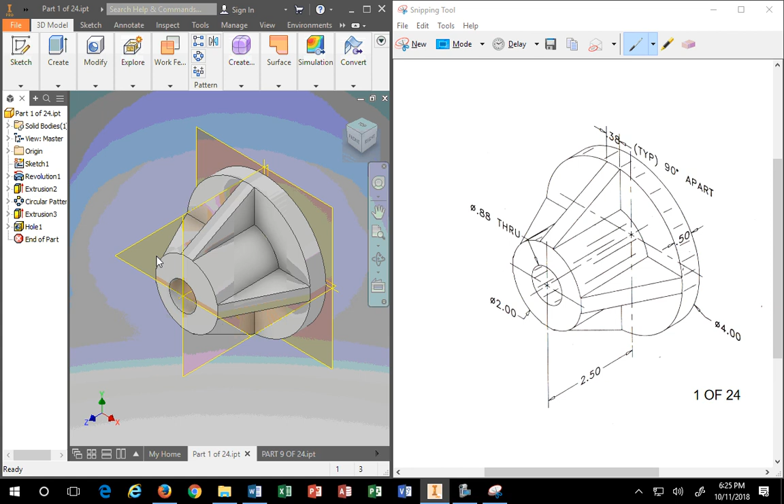The way to create the model, I have to open this up real quick here. We've got our model. If we go to File and New, you cannot use Export because that just creates PDFs. You actually go to File, New, and what you want to create is what's called a drawing. That'll generate a detailed drawing.

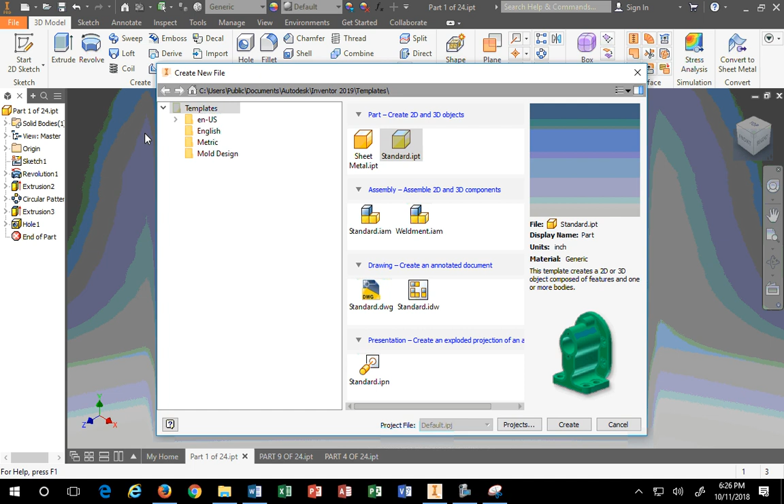You could go to New itself, and you'll get this dialog box of creating drawings. What we're going to do is go to English, and here, down here, we're going to make an IDW, not a DWG. IDW is an Inventor drawing file. DWG would be an AutoCAD file. So we're actually going to do an IDW.

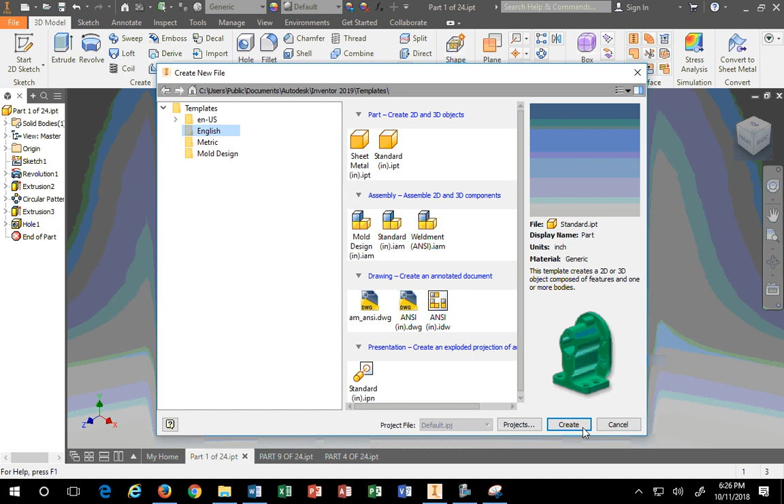If I go up here and just go to File, New, I don't see IDW. I see Drawing, DWG, as a default. If I click on this and wait a few moments, we'll see what pops open. It does take us into an IDW as well.

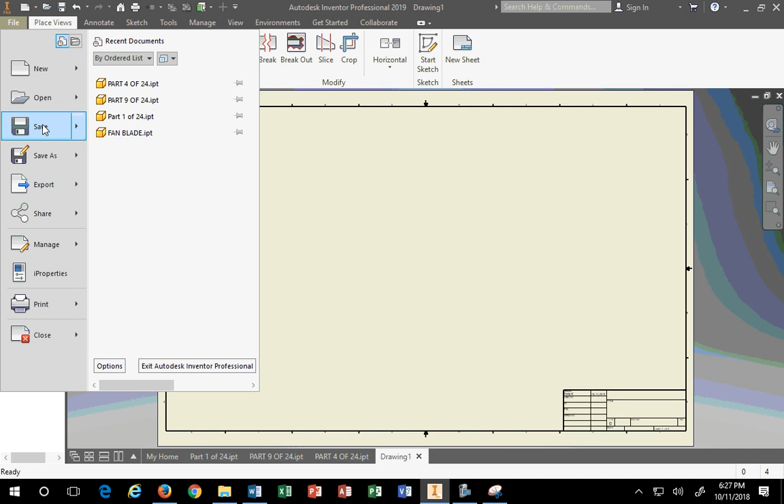And this is what an IDW looks like. It's an Inventor drawing file versus an AutoCAD drawing file. So if you go to New, and you pick ANSI IDW, and you hit Create, it'll pop open another IDW. Got it?

So either way, whether you go to File, leave my mouse there for a minute, and pick Drawing here, or File, New, and pick it here, either way will result in the same outcome as far as where you start, right here. So now I have 3 drawing files. I'll delete the first 2, and here I am with the first one.

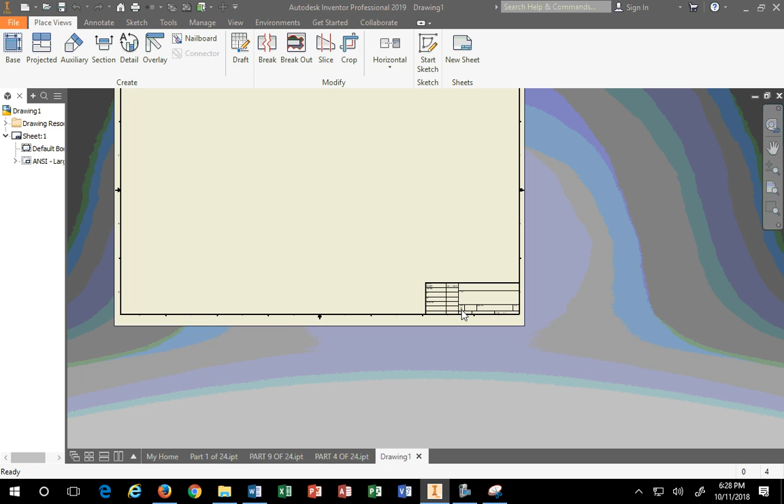The default setting, if you're out of the box, is the very large file type drawing file. It is technically what size? This is size D. It's a D size drawing. You will not make any drawings in D size. You will only do A size drawings in here, which means an 8.5 by 11 sheet of paper. You won't have a choice on that.

So your first order of business is to make sure that your paper size is correct. It's not to insert your views, because if you insert your views and assess everything in terms of D size paper, that's a huge sheet of paper.

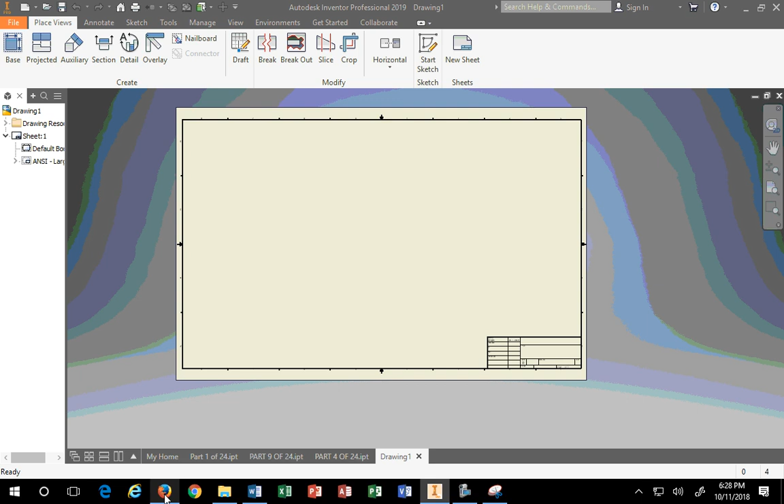To prove the point, if I jump online and look up D-size paper, you're going to find out there's ANSI A, B, C, and D. It's a 22 by 34 sheet of paper. It is very, very large. It is not the size paper we're going to be working with in this room. We are doing A size.

So then the bigger question is, where do we find this? How do I change my paper size? And can I ever create a template, once I do set up my paper and everything's perfect, for those of you that have your own laptops? The answer is yes. Once you have a perfect border with a title block the way you want it, size paper you want, you can save it as a template.

For those of you using these computers in this room, the answer is yeah, you've got to save it on your flash drive, because the default, when you do template, won't work. Meaning, when you go to File, New, if it doesn't reside on your computer, it's not going to pick the correct template. It's going to pick the one that belongs to the computer. If you're using your laptop, it will be your template. So if you're using your toys, that's fine. But if you're using our toys, no.

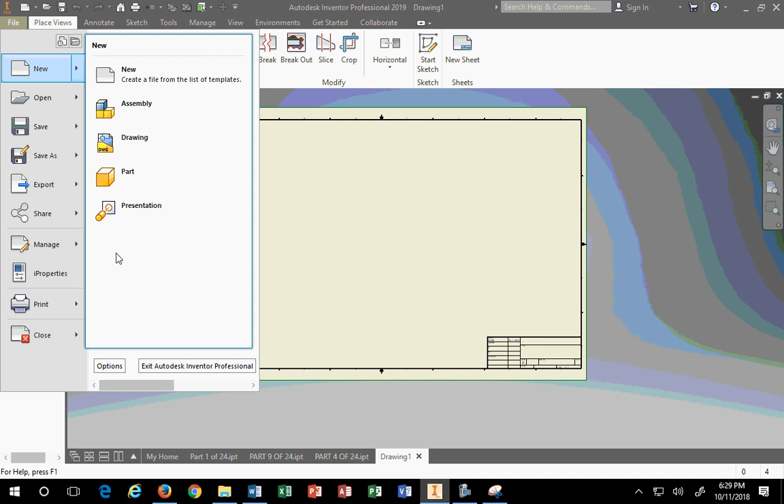You technically don't have a template. There's a way around it, but it's not as simple as now I can just pick it. So keep that in mind. In here, the first thing you want to do is figure out how to change your sheet size. That's your priority. So when you go up here, I'm going to do this a little bit at a time just so you see the process.

When you look at a drawing file, an IPT is Inventor part file, correct? So an IP, is it an IPN? What is it? What's IPN? When we go to New, you have IPTs, you have IPNs, those are presentation. You have IDWs, which is a drawing file.

You have IAMs, which are assembly files. Assembly files are next, that's what we'll talk about in a couple of weeks. What we've spent our time in is IPTs, and now we're going to spend some time in IDWs. We are going to spend time in IAMs and making a sheet metal of an IPT. That'll come up later.

So when we are in here, your views presentations are like, if I want to drop my views, bring in a base view, projected views, all that's up here. Draft is something that's useful, we'll talk about it later. These are different kinds of views.

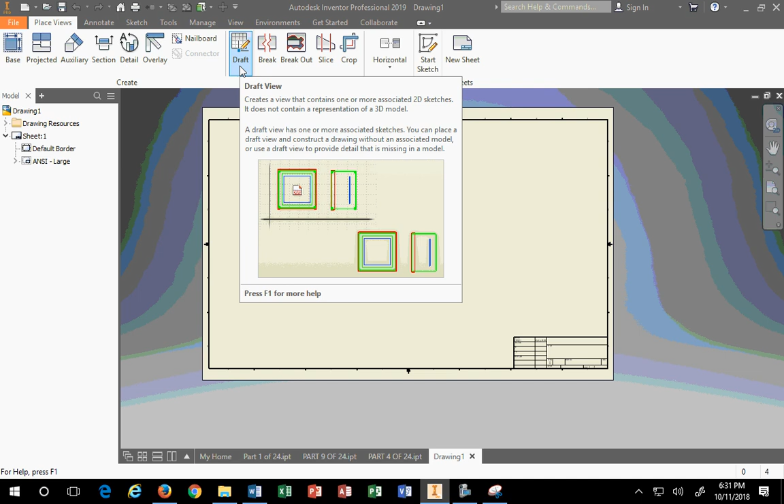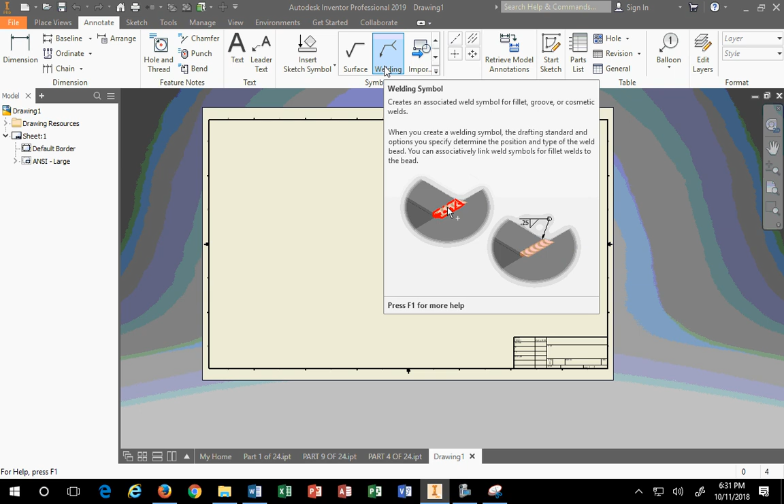Broken views, breakout views, this is where some of your sectional view options will come into play, where you could use these to help you with that. You can create a sketch in a view, but it won't be a real sketch like what you do in modeling. Annotation is all the dimensioning, including weld symbols and everything related to that. Sketching here isn't sketching to extrude, it's just sketching to sketch - it's a different kind of sketching, I'll show you that.

Under tools is where you have all your settings, and we'll talk about that when it comes to dimensioning your stuff. You have manage, you have view. I'm sorry, back up, let me stay in manage real quick - here, parameter styles editor.

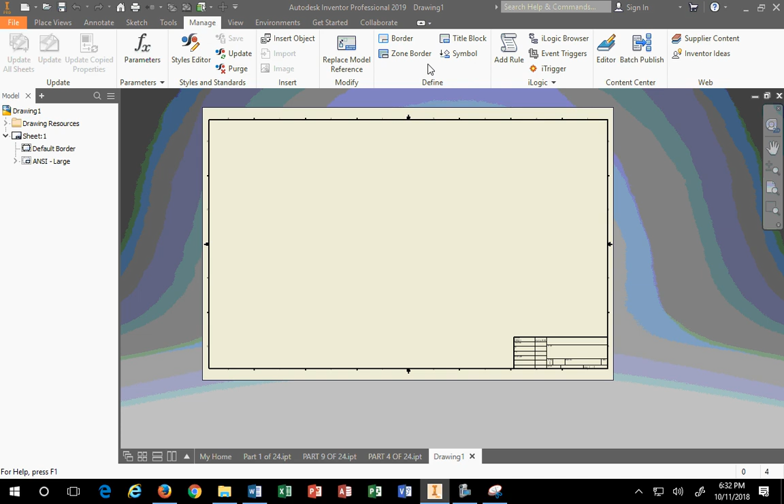You're going to spend some time in there - replacing model references, different types of borders, title blocks, defining the borders and title blocks. So if I go and say define a new border, that means I'm actually going to create a border. It doesn't mean that it's going to give me a template of borders.

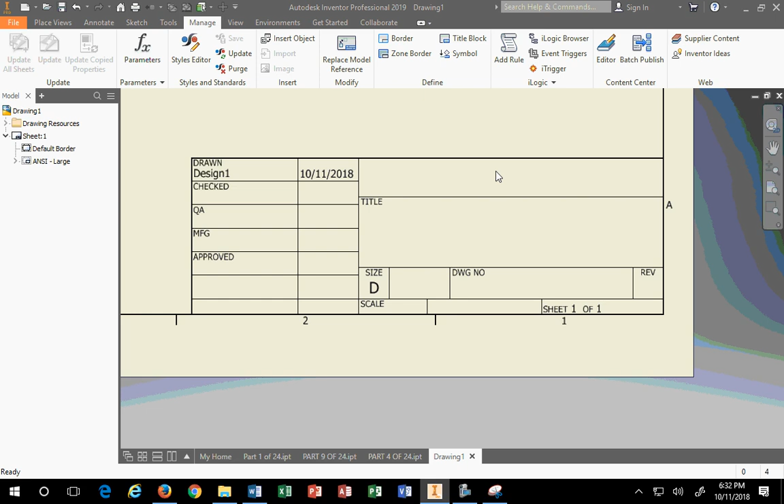That's one of the things you have to appreciate, so I'm going to discard that. That's if you literally want to change this to your custom company's border. You can do that, but if you're on these computers, not much is going to happen, to be honest. So when you're through all this, you're going to realize it's not in here that you change your border information - it's over here.

Your sheet is the sheet that you're in, like a tab. I can have a sheet 1, a sheet 2, a sheet 3, a sheet 4 - I can have multiple sheets that belong to the same IDW, and it's true, many times we'll do that.

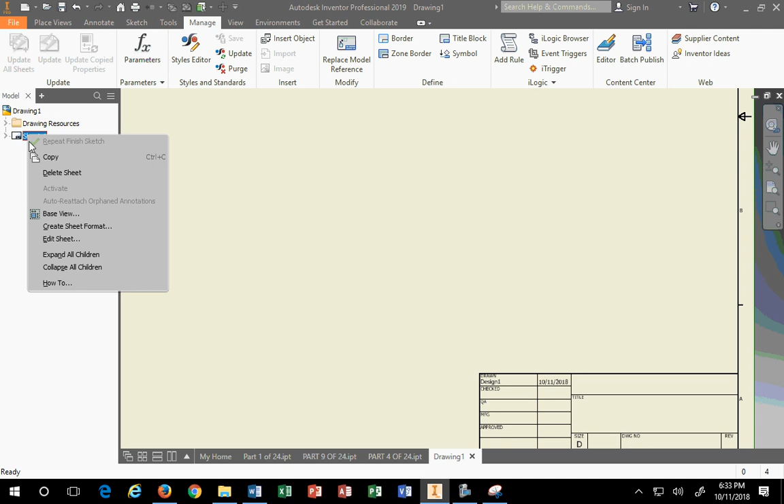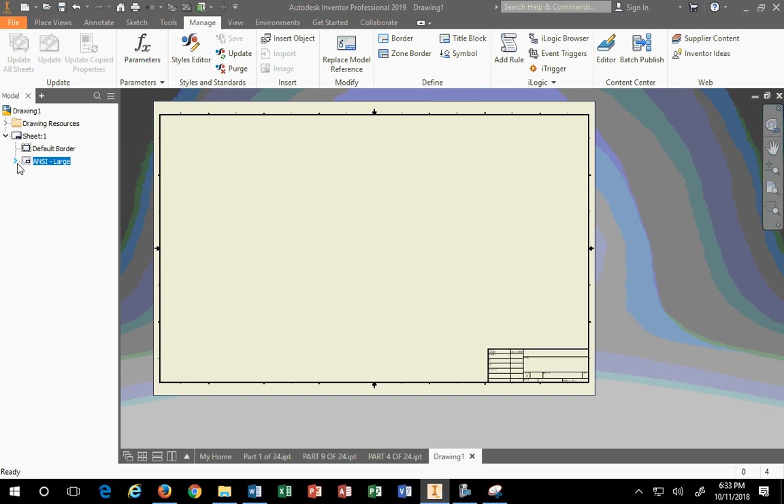If we want to, let's say we like this sheet and we want to add another sheet, we can go ahead and do that. But before we do that, we need to make some corrections to this one. Here's our default border, which is this border, and then there's something called ANSI large, which is the title block. If you open this up, you have the ability to edit the text field within this title block.

So under sheet, when I hit my right mouse button, that's where you're going to find some options. You can delete a sheet, you can have a base view, which is bring in a view, create sheet format if we wanted to, and we have something called edit sheet.

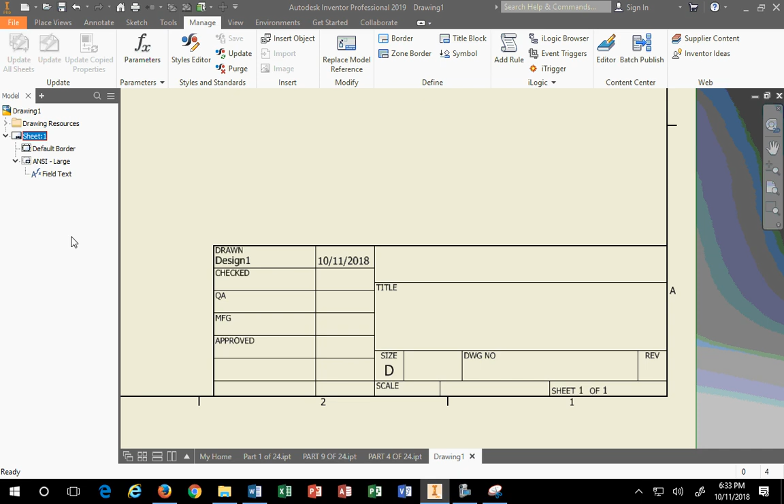When we click on edit sheet, it takes us to the name - what's it going to be called, what do you want to call this thing? Sheet's fine, you can call it whatever name you want. The size is right here: A, B, C, D. I'm telling you we're going to use A size paper - you need to remember what A means.

Revisions - let's say you make a correction. I give you back a drawing because you're going to print these out, these are going to actually print out for me to edit. When I hand it back to you, you're going to give me a revision to it, right? Well, the revision, you're going to want to make sure that it says A, revision A - you need to make sure that it does that, or B, or whatever.

In our case, I'll allow one revision. And then you hit, if you were going to include, let's say make it a title page, then you'd want to exclude it from the count. Like if I have 5 sheets, for example, your final project is an assembly - you might have a 15-part assembly, but then you want to have a cover page to it. That cover page, you don't want to be counted as sheet 1.

That's when you would exclude from the count. Then there might also be a page where you have your crazy notes about your project that you don't want to print. Not only do you not want it to count, but you don't want it to print. You just want it available when you look at it on the computer. That's what that is.

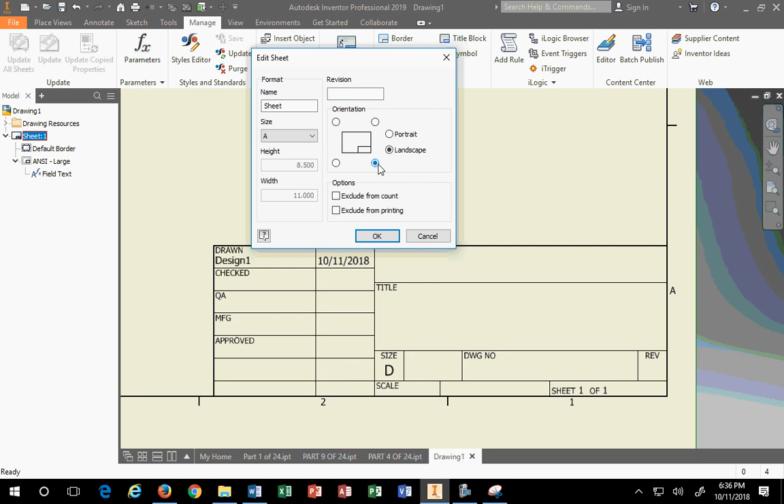When you hit OK, the whole thing gets really small. And then you're like, whoa, ANSI large is really large. That's a very large title block. You do not want a title block to own your drawing. That's not its purpose. So what's neat is up here — I was avoiding it every time I wanted to click on it, I moved my mouse away.

Up here is something called drawing resources. If I open this up, I have many things — I have sheet formats, I have A size, I have borders, different types of borders, I have title blocks, different types of title blocks. ANSI large is the one that's here. ANSI A is the one for A size borders, the smaller title block.

So if I click down here, you might want to click up here. You might be tempted to hit insert, and you're going to get an error message that says, hey, you already have a title block in your drawing — you can't insert another title block. Yeah, would it be nice? It says delete the existing title block before inserting a new one. Would it be nice if it just did a swap? Well, that still doesn't exist.

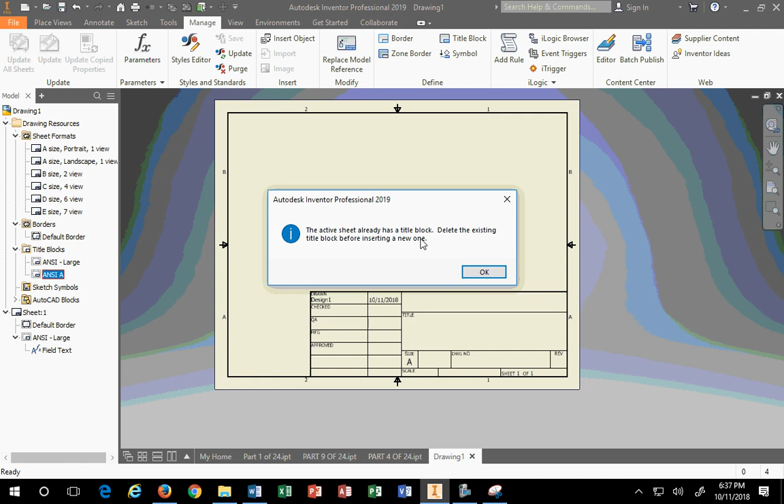I've been wishing this for a good 5 versions of this software — I haven't yet seen it. So when you hit OK, it's not going to swap it. You actually have to go down here, click on ANSI large, right mouse button, and delete it. Then you can go back up here, go to ANSI A, right mouse button, and insert it. Cool? And it's a much smaller title block.

But it's still not small enough, because it still takes up too much room in my book. My book. So let me show you how to fix that.

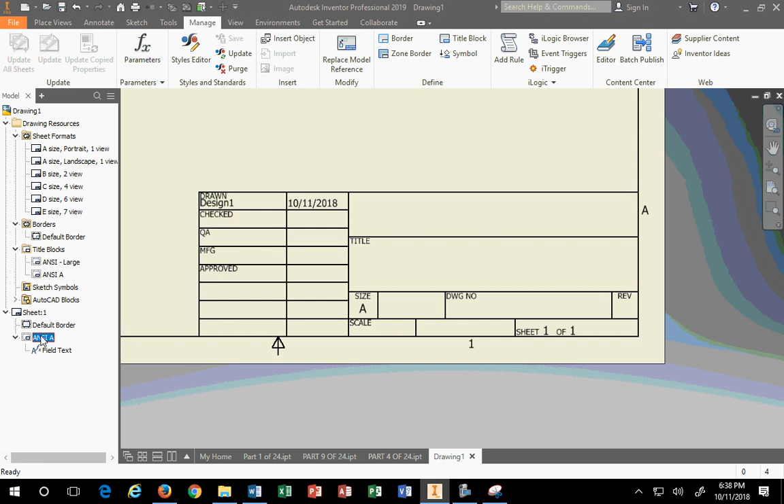When you click on ANSI A, right mouse button, edit definition — now you get to see the actual title block. All the little things inside the brackets are code. So when you go down here where it says field text, that's what they are. All those little brackety things are the code that says, hey, creation date, and you can type that in. Company name, you can type that in, in a chart format.

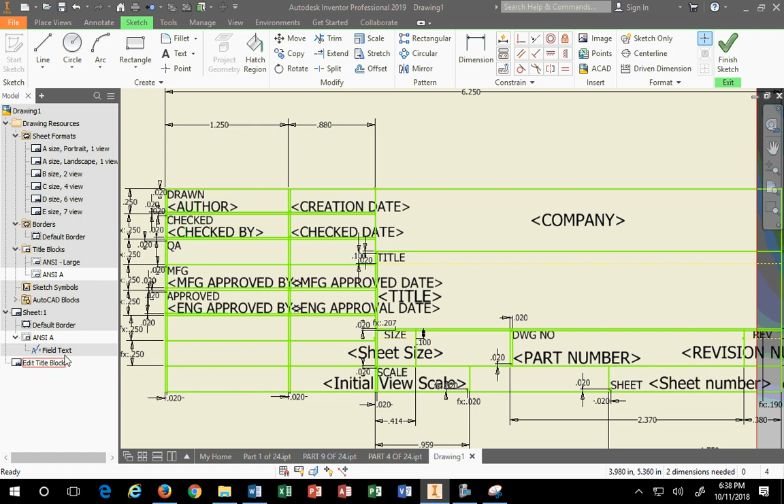Let me show you before we start tweaking this guy — I'll say no to changes. Again, down here, if I minimize this and open it up again, see where it says field text and I edit field text? This entire chart of content, all of this — check by, manufacturer, approval, all this stuff — these are property fields.

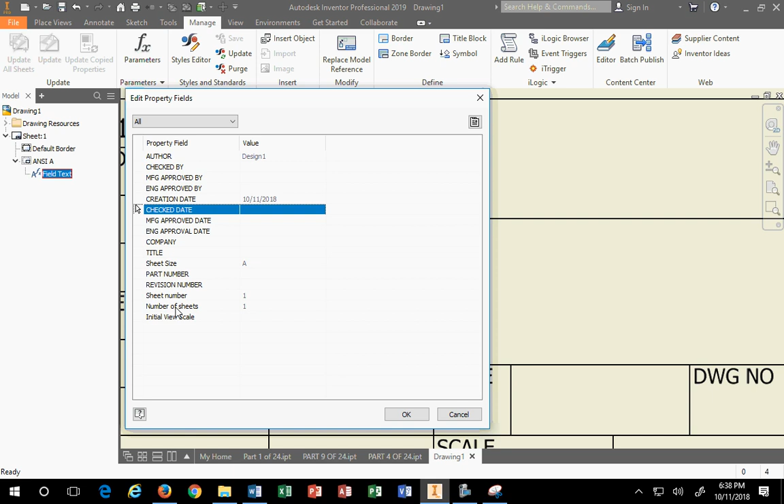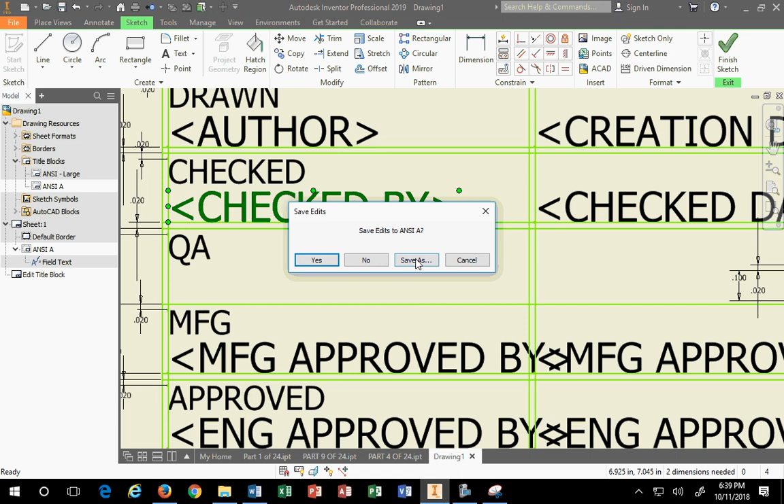When I go up here, right mouse button, edit definition, are these: author, check by. Anytime you see the double bracket, the less than and greater than symbol with something in between, that's a code. That is not just text — it's tied to the field text editor right here. Author, checked by, manufacturer, approved by.

And when you type in stuff — right now you're not typing in anything — you have to jump over to iProperties to get into the sections. Like if I typed in, I don't know, what shall I type in for the title? What was it called? 1 of 24.

And then the subject, who knows? Manager, I don't know. That's the person's name, I don't know. Sorry, I gotta have a little fun, a little humor there.

Let's see, what do we want to call our company, just for fun? Throw a name out at me. Acme? Is that the usual, Acme? What is it, Acme? What do they make in that show? Anvil company, huh? Anvils. We'll just call it Acme.

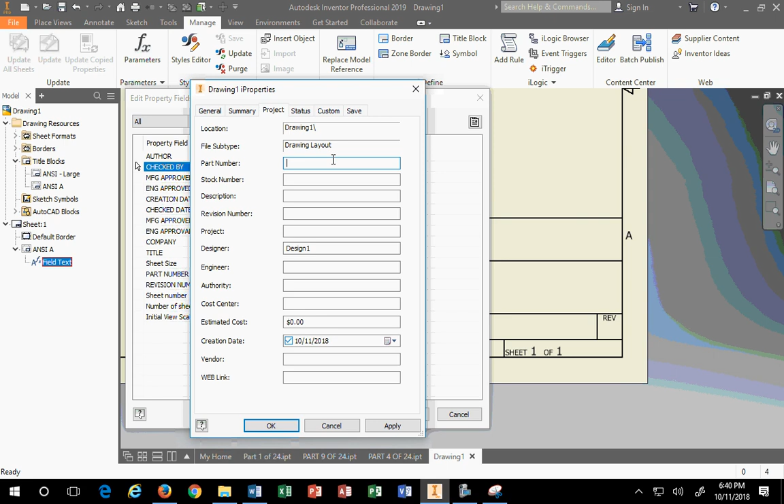Project, oh I forgot, category, don't know. Keyword, project, part number, 1234, stock number, let's just say NA. Description, thing. Revision number, that's revision again. Project, designer.

Engineer, authority, so if I say engineer, Daffy Duck. Gotta have a little fun. D-Duck, Daffy Duck, get it?

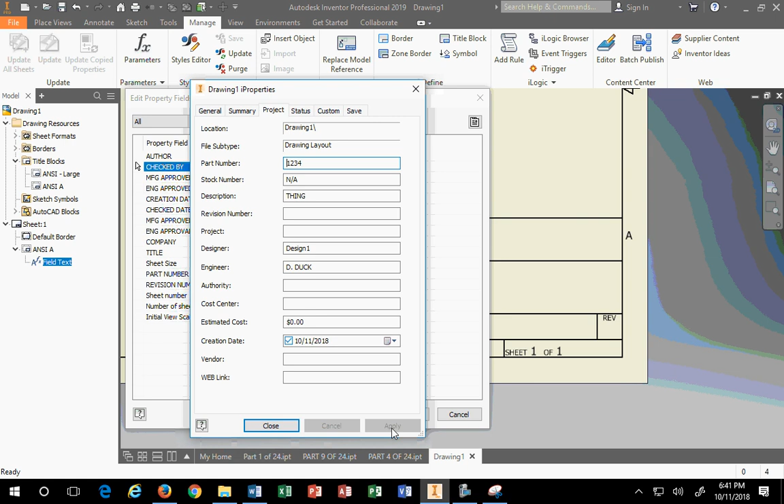Alright, and we go down the line. When I do all this in here and hit apply, it is actually updating here. So there it is, drawn in design 1. Nothing else is filled in here. Acme, there's Acme, there's the title, there's the size, there's the drawing number. See that? So it starts filling in based on what I did in the chart.

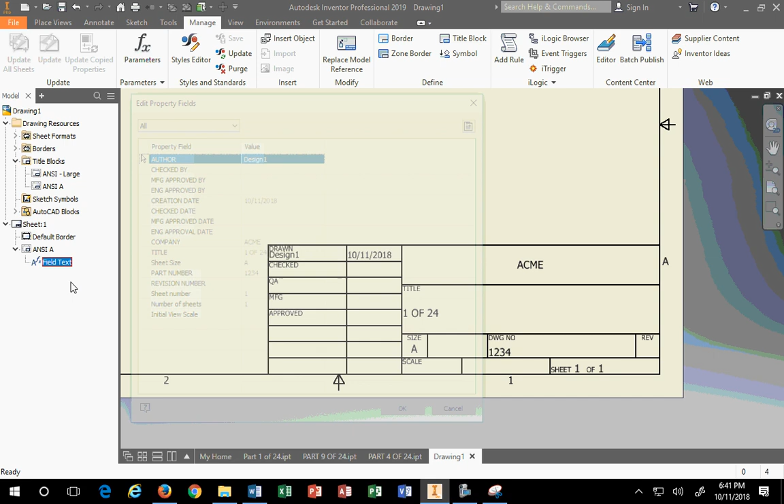I don't have, when you look in the edit field, I filled in company, title, sheet size, part number, sheet number, number of sheets. The number of sheets will change if I add sheets. Let's see, the creation date and the author. The author is design 1. I did go in here and we did have an engineer, Daffy Duck.

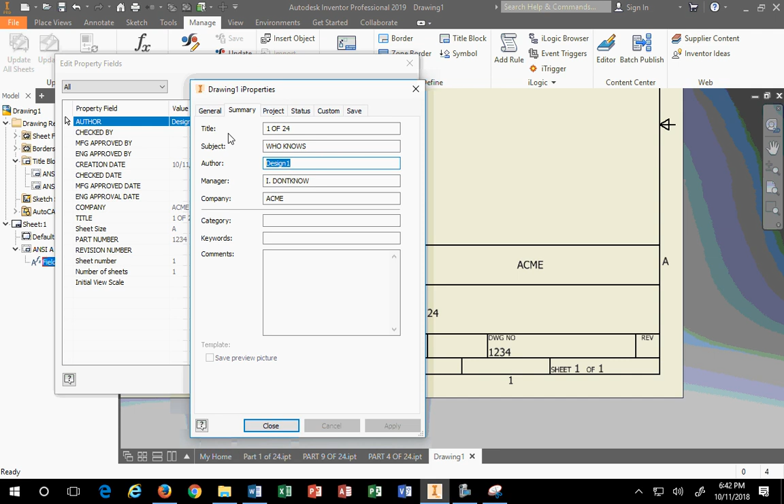But Daffy Duck, none of this is in here. Under project, the engineer's here, but the drawn by person isn't here. That's under summary. The author, J. Doe, Jane Doe. There.

Now if I do this, there you go. See how it changed? So that's what's in the brackets. So when we edit the definition of the title block, we don't necessarily need all this content. We really don't even need the author unless you want your name on it.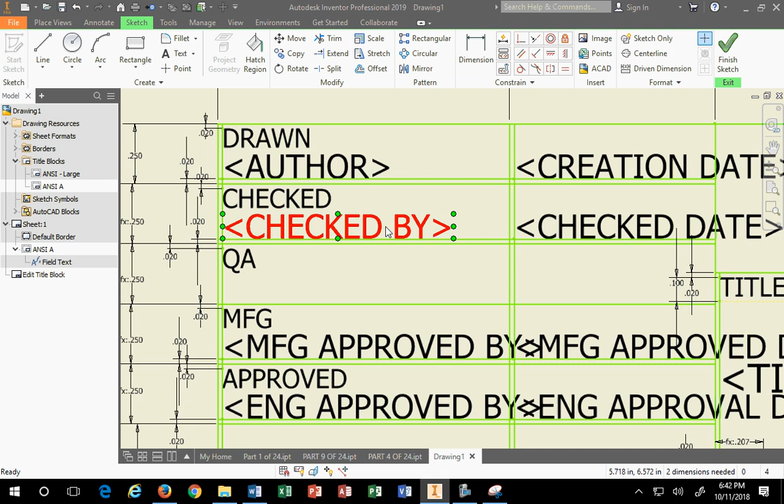We could always save that part, but the rest of it we don't need. We don't need checked, we don't need that content either. We don't need the QA information, we don't need the manufacturing information, we don't need the approved information because I'm not going to run it through that manner. We need the size, yes, the size paper. Drawing number is fine, revision is fine. Sheet's fine, scale is fine.

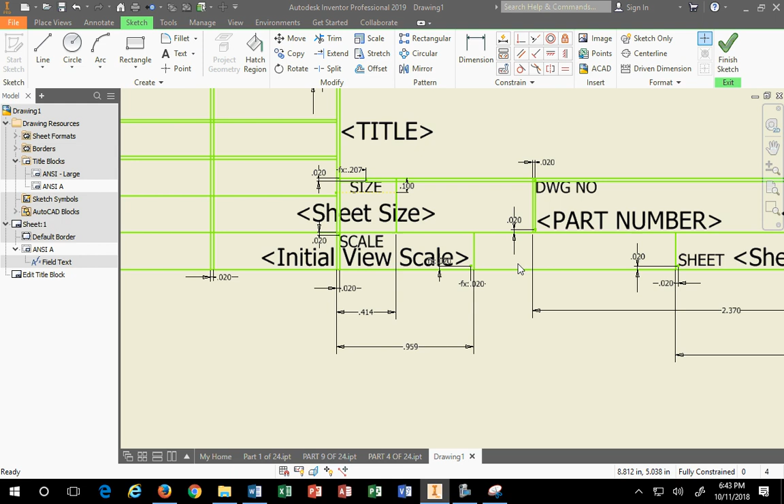So out of all this, we kind of took a lot out. The company, if you want a company name, go ahead. I don't think we need a title, but I think we can always use a company name. But notice when I move stuff, you see how it moves in an odd manner?

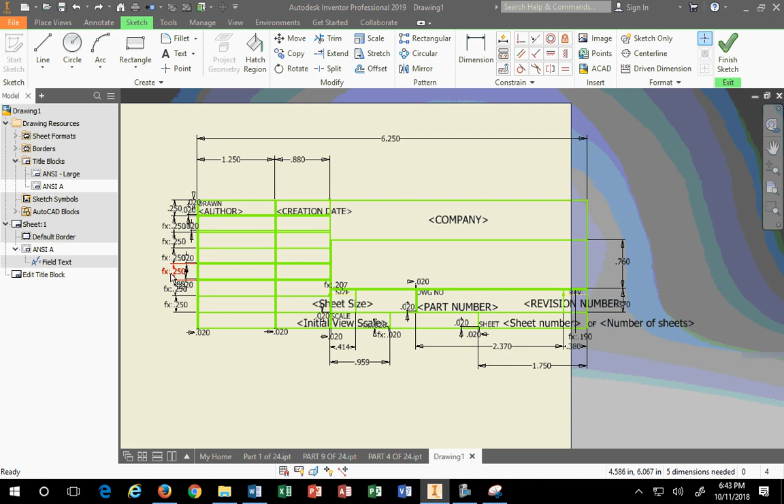The reason it moves in such an odd manner is because everything is defined. See all the dimensions here? All of these dimensions are in there defining how everything should be laid out. So if I start eliminating things, which I just did, then it also eliminates those barriers.

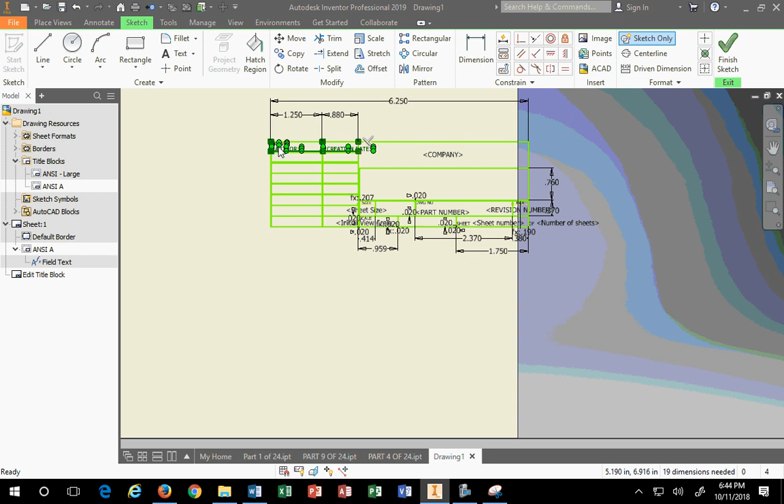Then I can literally take something and get a little closer to it. I can actually, can I move it? Or is it all locked in together? What do you think's in the way? If I try to move this guy, what's it doing? What's it attached to?

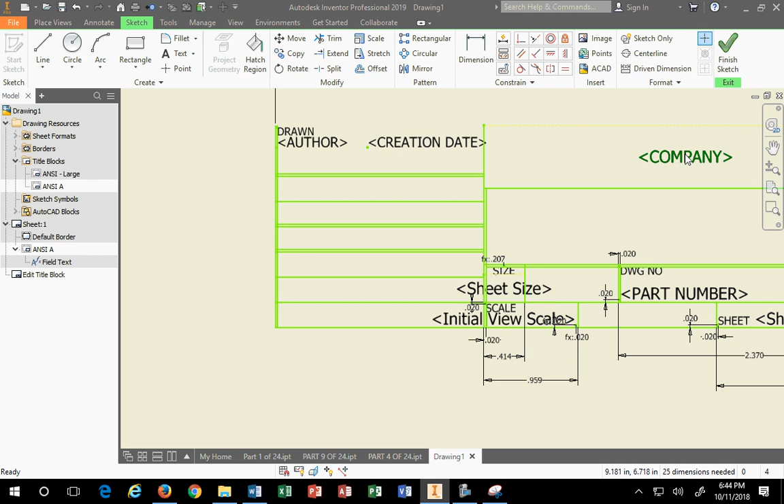It's attached to this line. It's got something else, it's not a dimensional constraint. What's the other constraint? Geometric. Constraint of geometry. As I erase things from here, then I start getting freedom of motion because I've eliminated what was in the way.

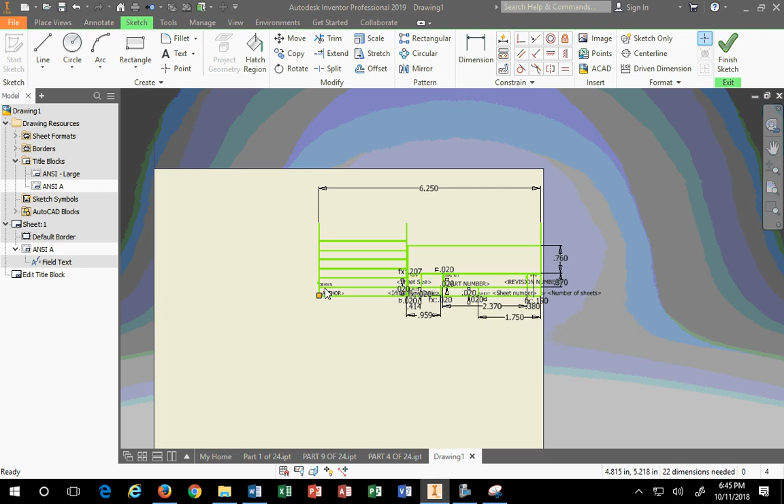So if I leave drawn by, notice how this moves? See that? Take creation, if I need that, or I could just leave author, who drew it. You can create, in essence, a custom title block. See that? It takes a little bit of finagling.

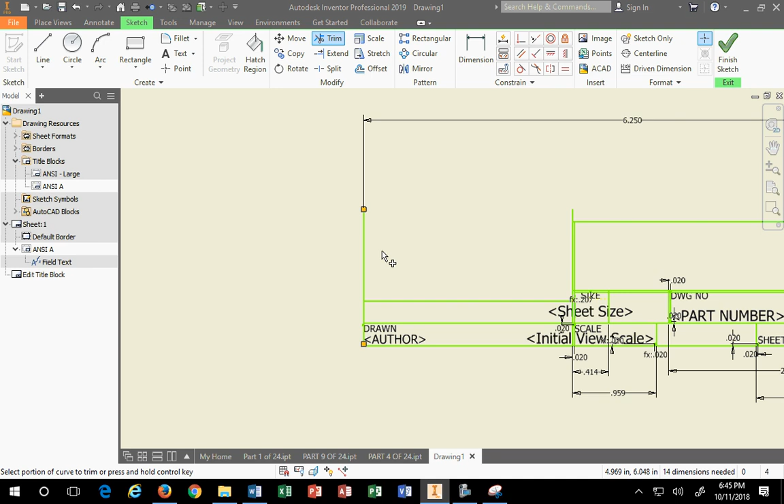The constraints are your dimensional constraints up here. You have certain things that are in the way. As you start trimming this down, it is like a real sketch. Why? Because it is a real sketch. You'll start being able to clean this up and eliminate pieces that you don't want in here.

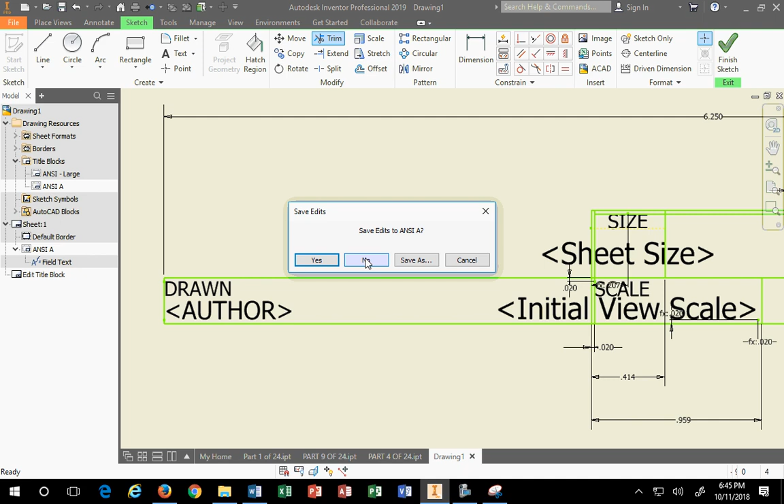I'm actually wiping out a big chunk of stuff that's in here in order to be able to slim down the border, the title block, I mean, that's going to be inside the border, to something that's a little more manageable. If I say finish sketch and say yes to saving the edits, see that? Now you end up with a slimmed down title block.

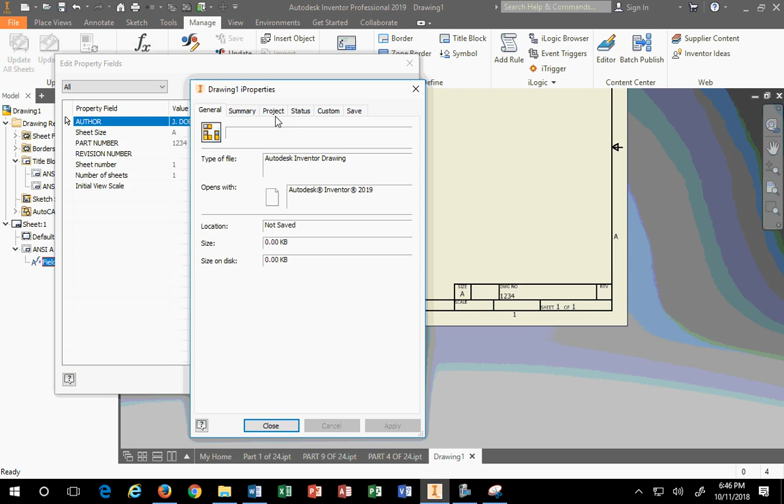It's not so intense. The drawing number, you want it to be 1 of 24. I made it 1, 2, 3, 4. So that can be fixed when you edit the text field and go into iProperties. When you go to project, that part number is 1 of 24.

The descriptions, all that doesn't matter for this purpose. When I hit close and OK, there you go, it updates. Now it doesn't matter what I name my file.

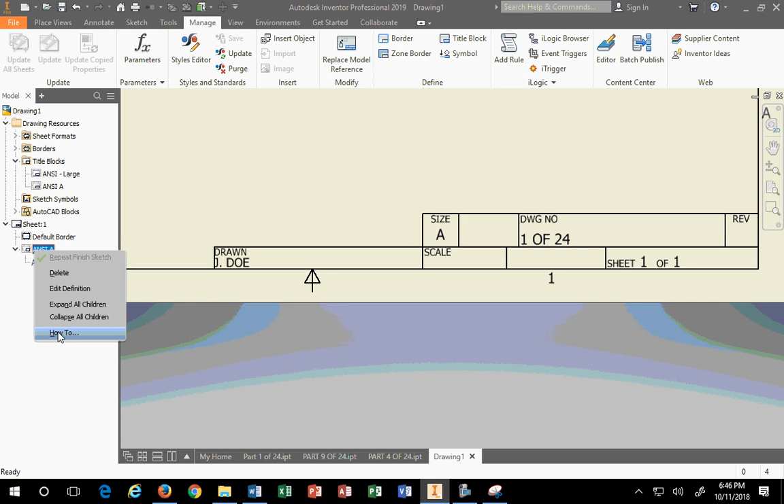Remember how I said earlier, naming your files will help you here? But in this case, I eliminated title. Did you notice that? That was one of the things I eliminated, because I wanted a thinned down title block.

The other thing I could eliminate is this line here. That will allow me to drag this over a bit more. You notice how something just went upside down? So be careful.

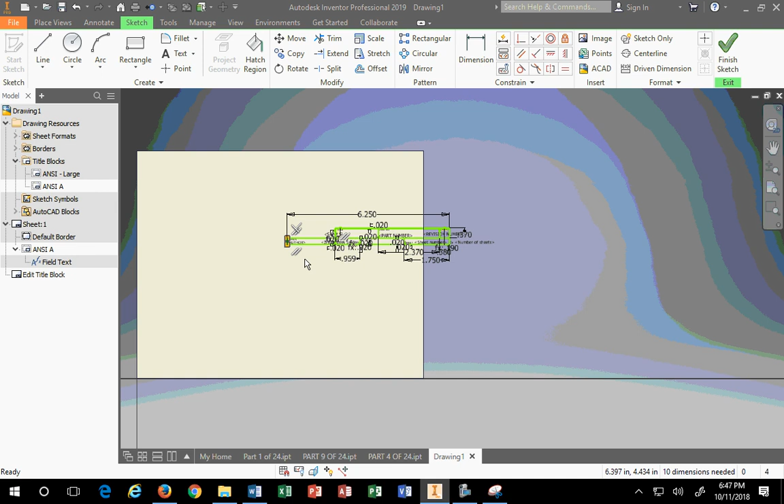See how when I move it, one of the tags turned upside down on me. So be careful how you move things. Unless you have a really long name, I would probably tell you to shorten this up to only the length that you need for your name. If I drag this over a bit more.

And when you finish the sketch, you'll have a nicely tightened up, clean border. Or you can make your own. I don't care, I'm just showing you how to at least edit the one that's there.

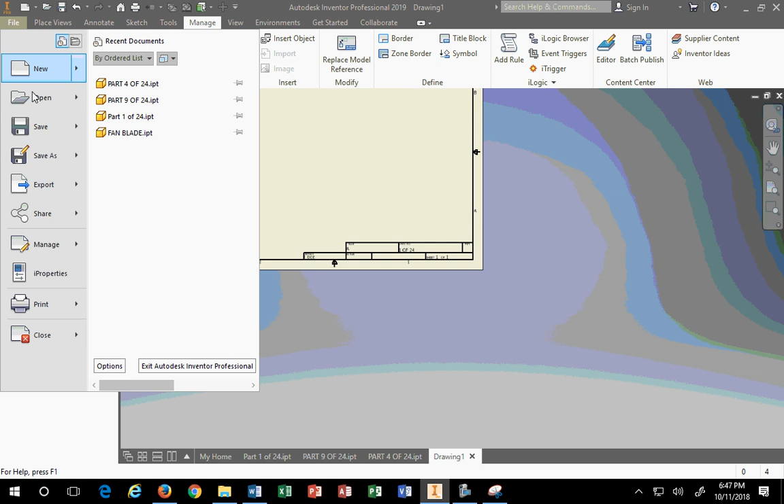This, however, will not save on these computers. So if you want to make a custom border, you're going to have to, before you do anything, do a save as, and change this to a folder that you're going to have access to, number one. But the file name is this drawing number.

We are going to options. Yeah, this is all fine. You can hit save, make sure to go to a file folder that you can save to. The other thing is you can export this.

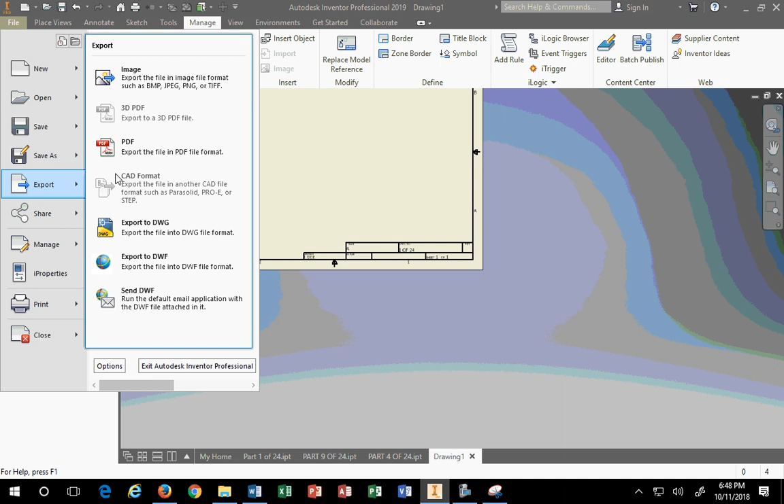And nope, to a DWG. That's not going to help you. Let me see. You're going to save copy as template.

See that? If you are using your own computer, you can do this. Because when I click Save Copy as Template, I'm going to call it Thing, just to call it something. I'm going to call it Thing.

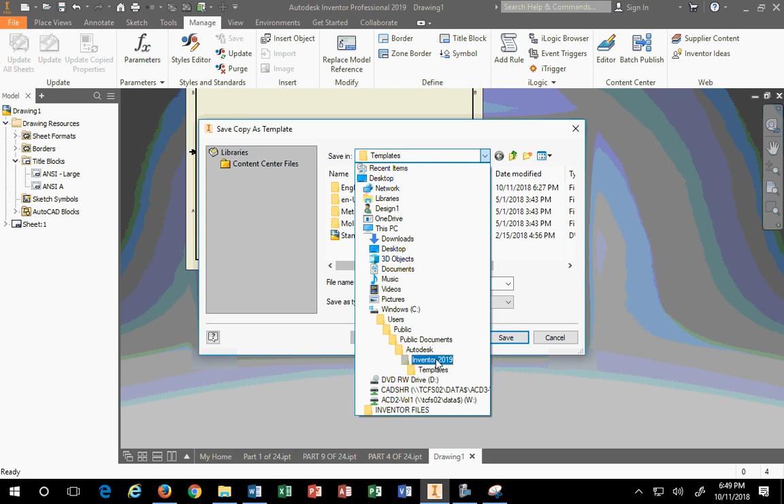You see how standard is right there? And when you look at your templates, it saves to your C drive inside your folder where you're putting Inventor 2019, wherever it's saved on your computer, under the second subcategory called templates.

If it's not saved there, you will have the following issue. See, it's there. If you don't save it there, now let me just exit it. I go to File, New. Here I will have to pick New.

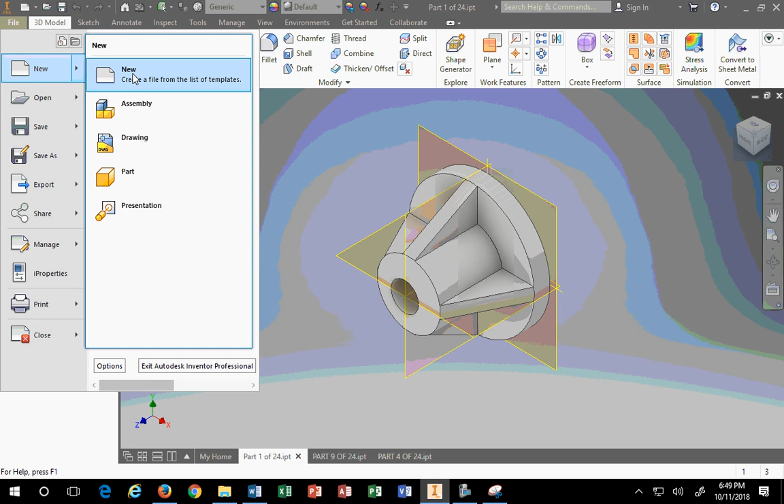If you don't save it there, did I mess up? I could have. You won't have access to it here. Because the only thing that shows up here, let's see where it may have gone. There it is. I had to go up to the top level.

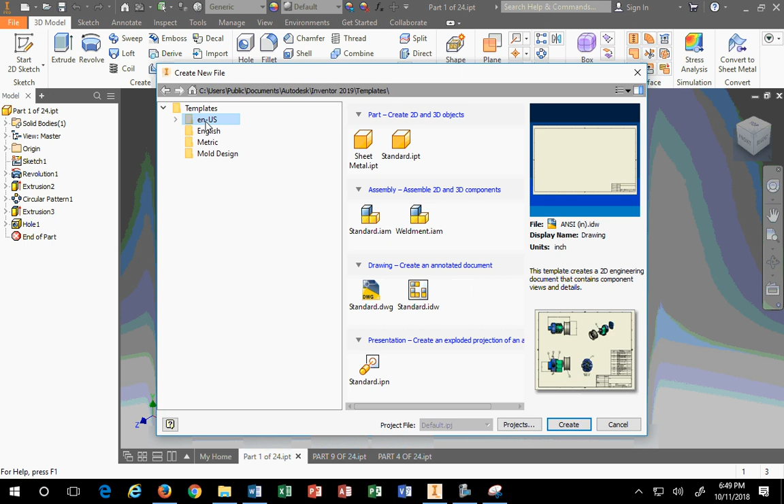Because this is English US, English, metric, mold design. So when I go to the top level of templates, there's Thing, up here. If it's not saved in that folder, in this subcategory right here, you see where it says Users, Public, Documents, Autodesk Inventor 2019 Templates? That's the only thing you're going to see in here.

You'd have to change the home location to somewhere else for it to see wherever it is you chose to save your template, which is not the best situation. So you want to just go here, and there's Thing, and that you can work with, because now you have Thing as a template you can pick.

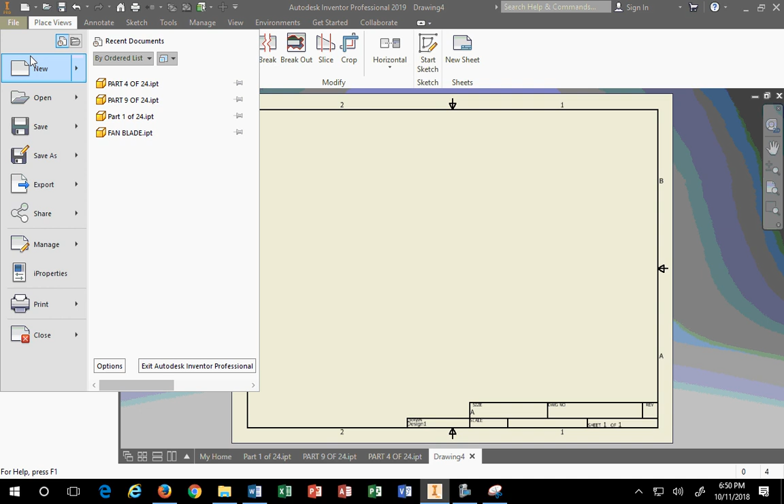You'll see the video, you can watch it again. Again, when you go to File and New, and this time you do have to hit New, and go to the top level, that's where you'll find your file.

If you are using these computers in this room, though, what happens is when you shut the computer down and turn it back on, that file is gone. That's why I say making templates in here is not that easy.

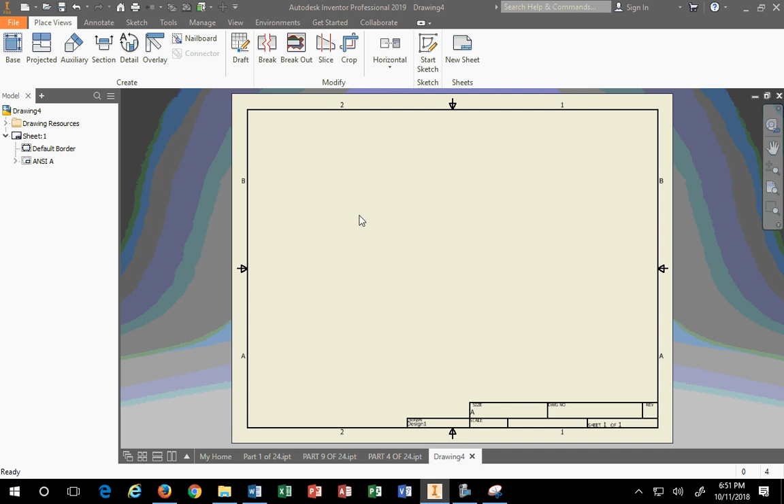But that's your step one, making a template. If you really want the true beginning, it is to make a template, then it would be making a detailed drawing. Now, let me cut off the video here for the template, because that way you can have it available for you. If I'm looking at how to make a template in Autodesk Inventor, this is how you do it.